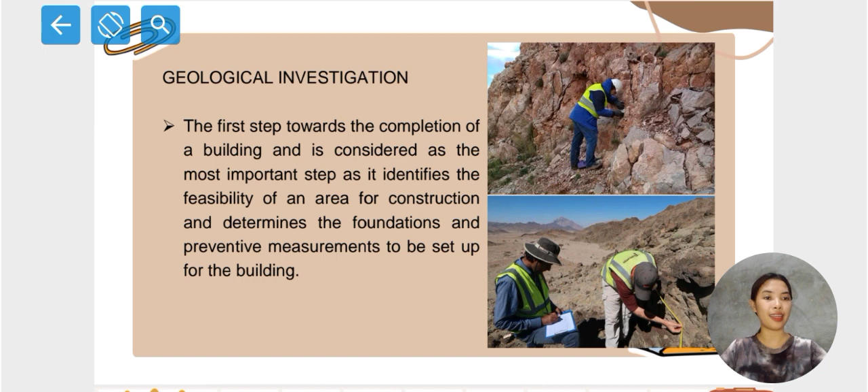So let us move on to the methods of geological investigations. First up is the site investigations. So the main objective of site investigation is to assess the suitability of a site for the proposed structure. As such, it involves exploring the ground conditions at and below the surface.

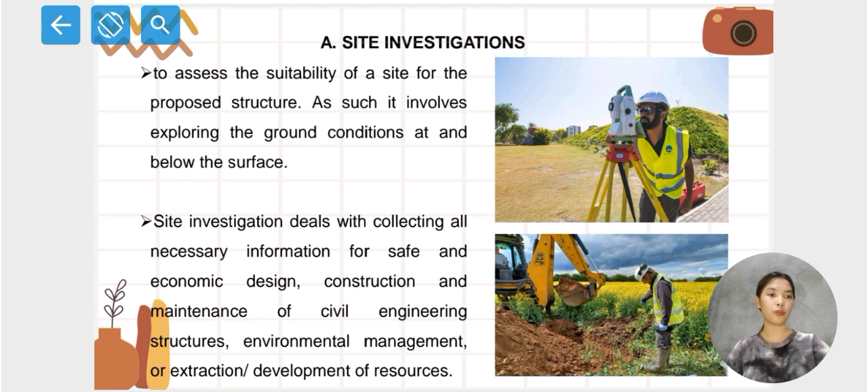So, under the site investigations, there are three parts, and the first one is the desk study and preliminary reconnaissance. The objective of a desk study is to examine available archival records, literature, maps, imagery, and photographs relevant to the area or site concerned to ascertain a general picture of the existing geological conditions prior to a field investigation.

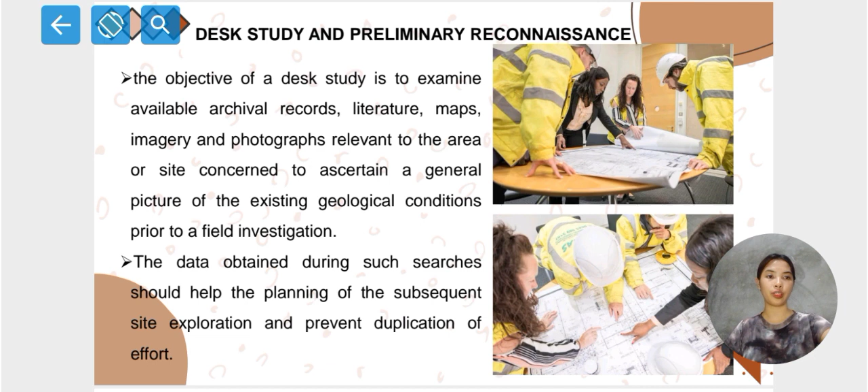The data obtained during such searches should help the planning of the subsequent site exploration and prevent duplication of effort. Given that this is the first stage of site investigation, the engineers will have an initial assessment about the conditions of the area of the site with this collected data. Also, they may be able to predict and assume potential problems such as geotechnical problems.

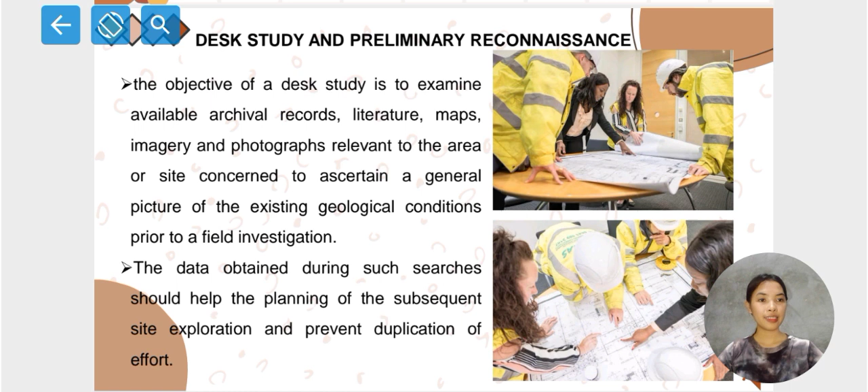For example, yung positions ng faults sa area na yon kung meron man, and how it will affect the construction in the future, and the building itself.

The second part of site investigation is the remote sensing. Remote sensing involves the identification and analysis of phenomena on the Earth's surface by using devices borne by aircraft or spacecraft. The information they provide can be transposed to a base map which is checked during fieldwork. The data also can be used in geographical information systems.

So, ang remote sensing ay very crucial sa site investigation because they provide valuable data about the Earth's surface without direct physical contact. So, a good example of this is yung nasa Google Map sa ating smartphones. Another example is satellite imagery. So, they allow the detection of features such as topography, land cover, vegetation, and geological structures, aiding in various applications like environmental assessment.

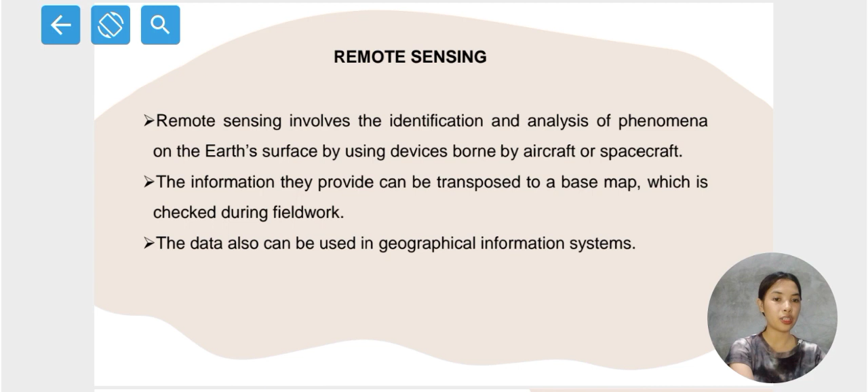The third and the last part of site investigation is the aerial photography. A study of aerial photographs allows the area concerned to be divided into topographical and geological units and enables the engineering geologists to plan fieldwork and to select locations for sampling. This should result in a shorter, more profitable period in the field. The amount of useful information that can be obtained from aerial photographs varies with the nature of the terrain and the type and quality of the photographs.

So, aerial photography is actually a remote sensing technique that involves capturing of images through aircraft or drones. These images provide detailed visual information about the land features of the certain area. So, aerial photography is very useful in site investigation because it is used in mapping and identifying the changes over time. Also, assessing the environmental conditions.

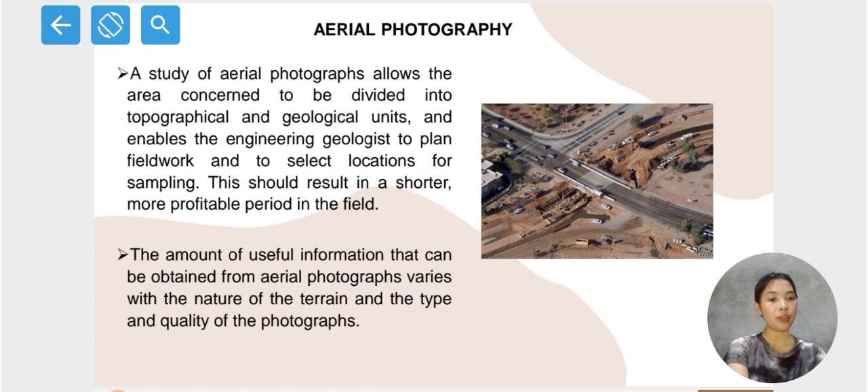The next method is the exploration method. It is the process of determining the layers of natural soil deposits that will underlie a proposed structure and their physical properties. So, ano yung purpose ng exploration method? There are 7 purposes. The first one is selection of type and the depth of foundation suitable for a given structure. Second, evaluation of the load-bearing capacity of the foundation.

Third, estimation of the probable settlement of a structure. Fourth, determination of potential foundation problems. Fifth, establishment of groundwater table. Sixth, prediction of lateral earth pressure for structures like retaining walls, sheet pile, bulkheads, and braced cuts. And seventh, establishment of construction methods for changing subsoil conditions.

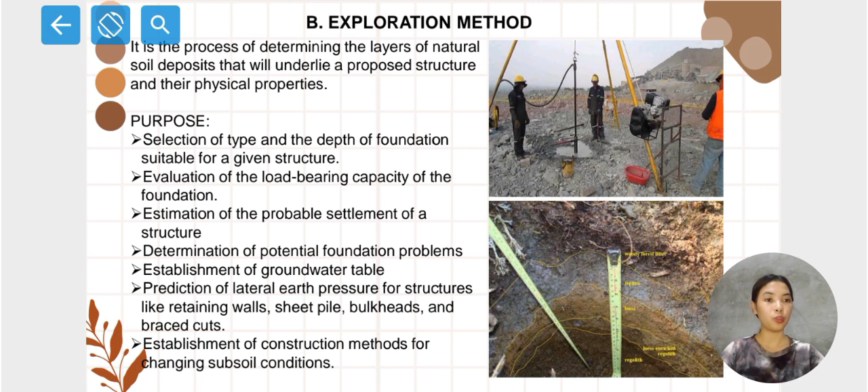So, napaka-importante ng exploration methods because it identifies the ground conditions and its surroundings that will affect the foundation of the building and its stability and load-bearing capacity. One subpart of exploration methods is geotechnical design reports. The soil and or rock specimens collected from the field are subjected to visual observation and appropriate laboratory testing.

After the compilation of all required information, a soil exploration report is prepared for the use of the design office and for reference during future construction work. Although the details and sequence of information in the report may vary to some degree depending on the structure under consideration and the person compiling the report.

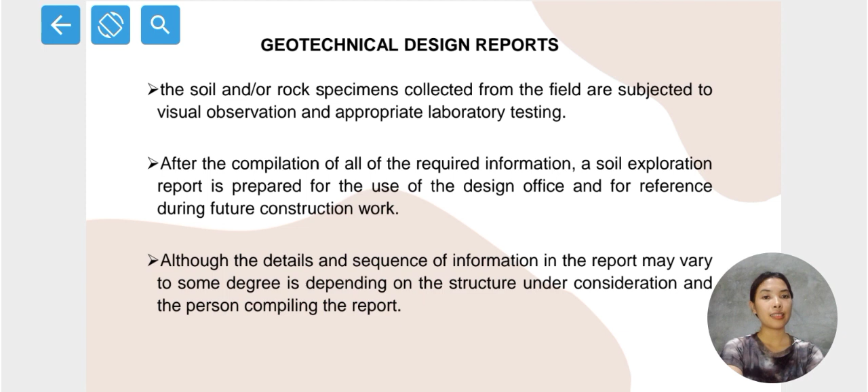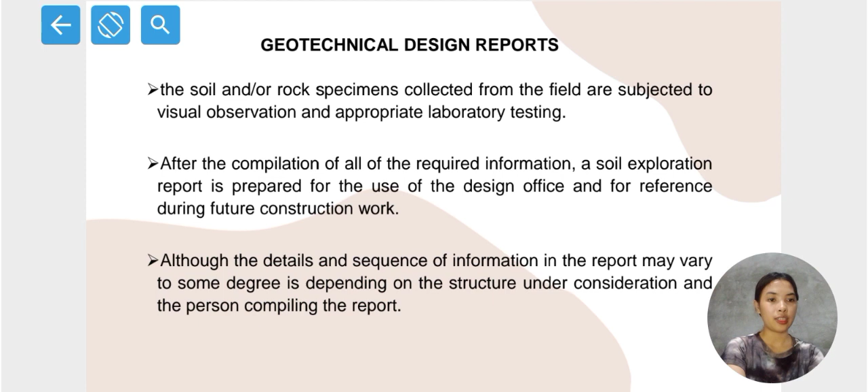In addition, ano nga ba yung mga data na included sa geotechnical design reports? This includes the soil composition, stability, and potential hazards. The next and last part of exploration methods is the subsoil exploration reports, the process of conducting fieldwork and laboratory tests to obtain information about soils needed for proper project design and construction, and to determine the engineering properties of soil at the proposed tank site.

So, ano naman yung mga data na dapat ay meron sa subsoil exploration reports? Ito ay ang mga soil types, density, moisture content, and bearing capacity. So, napaka-importante ng subsoil exploration reports dahil nagbibigay ito ng assessment sa feasibility of construction projects. Subsoil exploration reports are also helpful to mitigate risks associated with subsurface conditions.